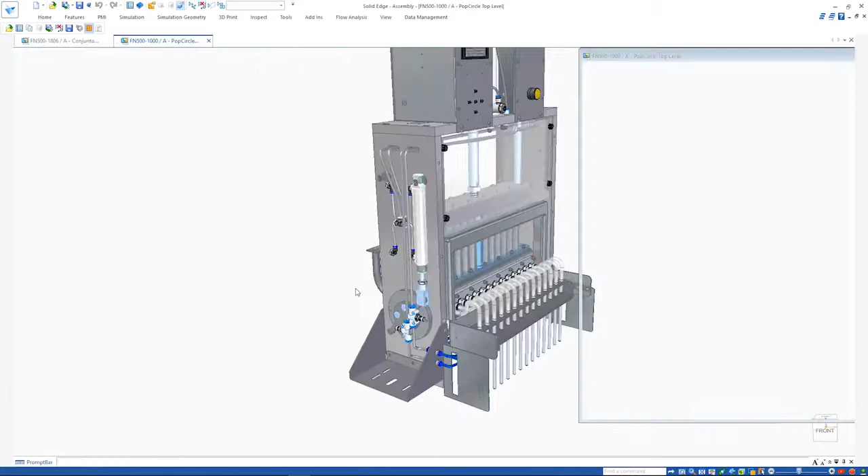It's common practice for suppliers to provide a 3D file of purchased items, such as this piston assembly. Using the new Internal Components option, all separate parts are contained within one single assembly file, with no parts written to disk. This enables faster import times, especially on larger data sets.

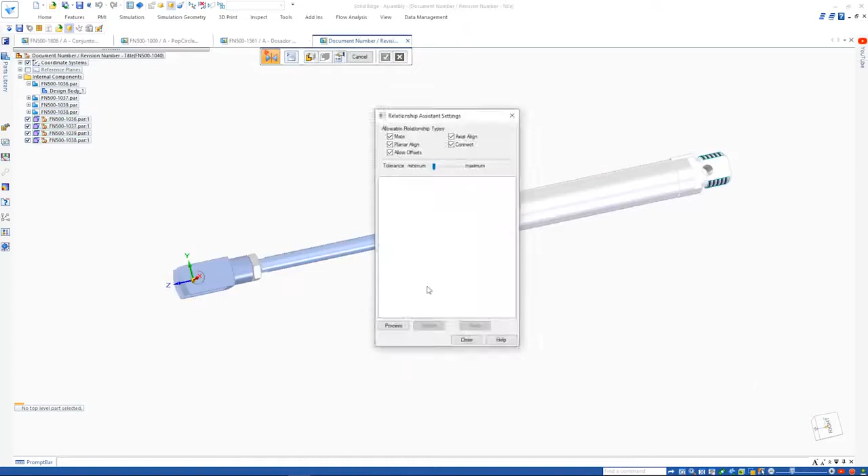Even though these parts are all internal, we can still analyze mechanisms and then assemble the item in a way it would work if it were a regular assembly. Assembly relationship creation and many other operations such as measurement can be performed on inactive parts. This provides increased performance and lower consumption of system memory. Here we see the correct operation of the piston assembly with its internal components.

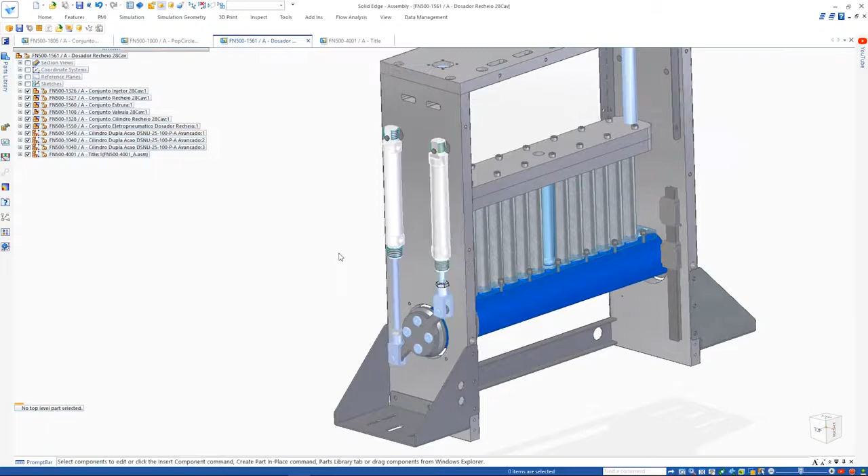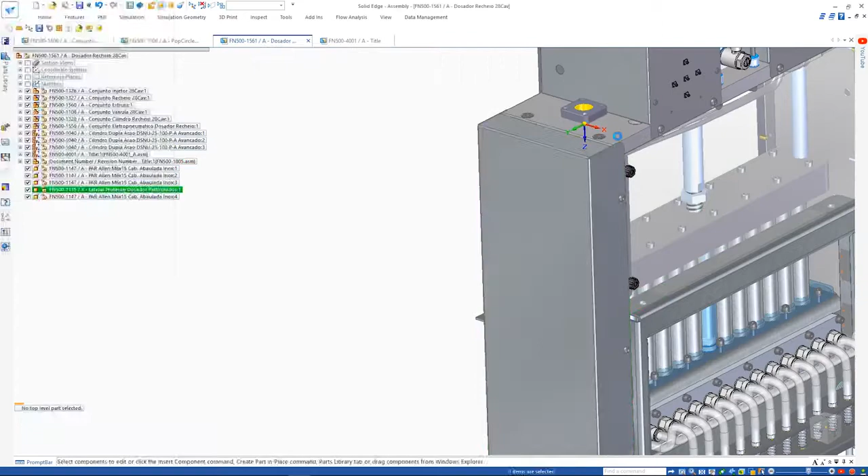Reusing designs is easier too. Now when copying and pasting multiple parts and assemblies between designs, existing assembly relationships are automatically captured and reused in the target assembly. A step-by-step process guides you through the operations to add the external relationships required to fully position the parts. All internal relationships come along for the ride. This significantly reduces the time for these operations.

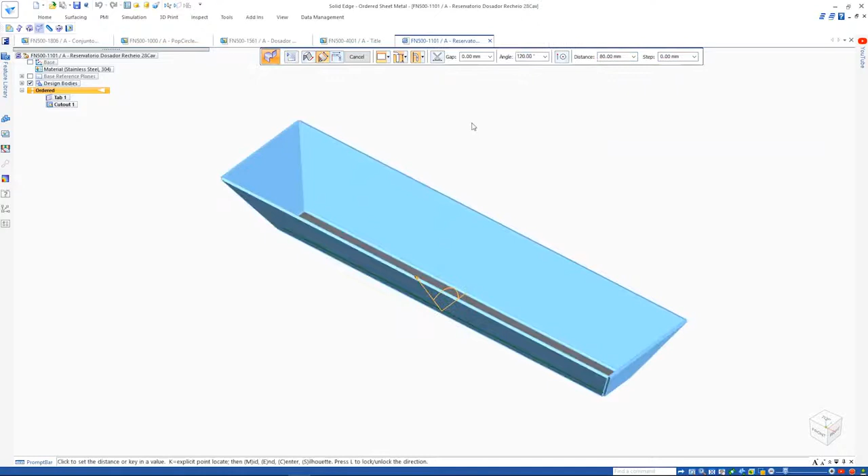A new multi-edge flange command speeds the process for designing sheet metal parts. Multiple edges can be selected at the same time, angles can be defined, and miters automatically added. It's as simple as picking the edges and then pushing or pulling.

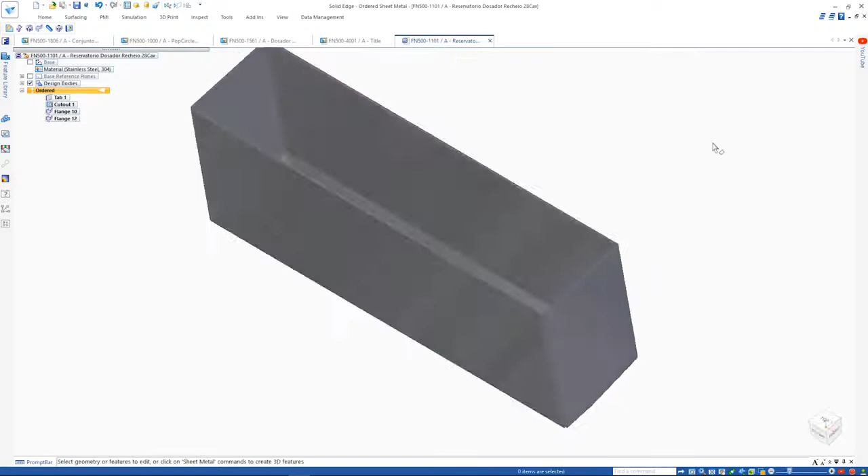In addition, partial or centered flanges can be defined, and trim options make light work of tasks that would normally require multiple operations, even with offset or gap distances if required. These sheet metal enhancements, along with many others, increase productivity and efficiency by being able to design parts faster and easier.

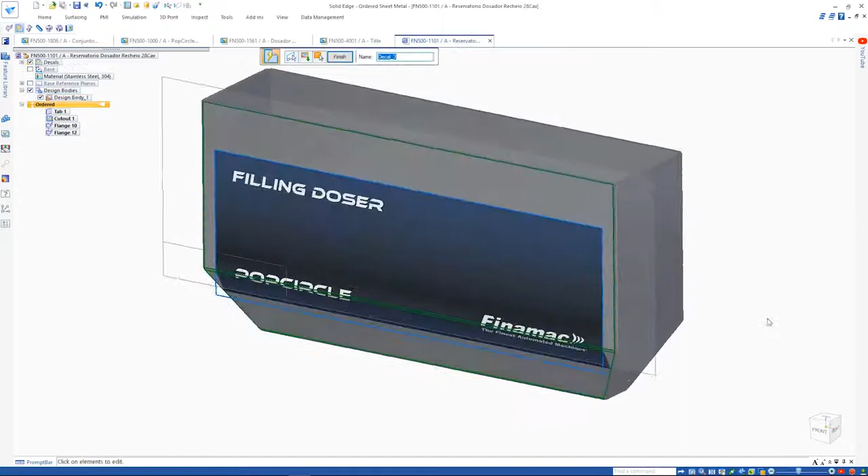A new decal command makes it quick and easy to add labels and images to parts. Simply select the desired image, define the desired size, and position it accurately using regular sketch relationships and dimensions. The decal can span multiple faces as we see here. However, changing the position of it is as simple as modifying the dimensions or relationships.

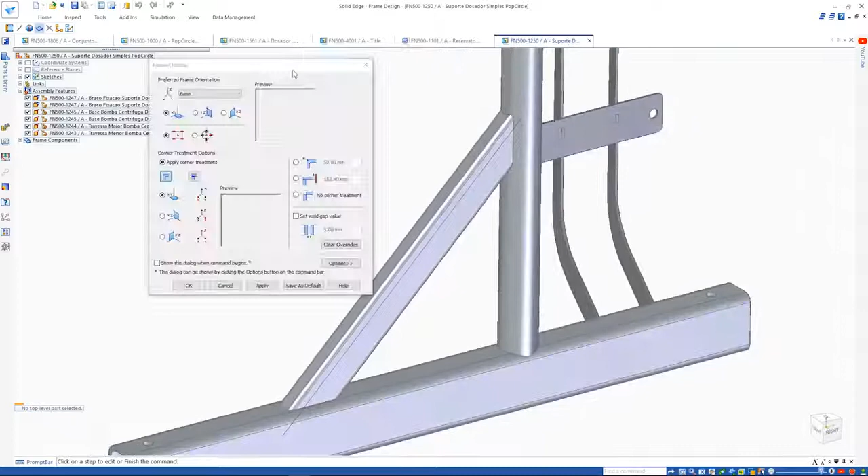Solid Edge 2021 also sees enhancements in frame design. Here we'll place a cross frame which has coping applied so that it matches the circular cross-section of the vertical frame. Now we can specify a weld gap between two frames. This is especially important in generating an accurate cut length of welded frames in our parts lists.

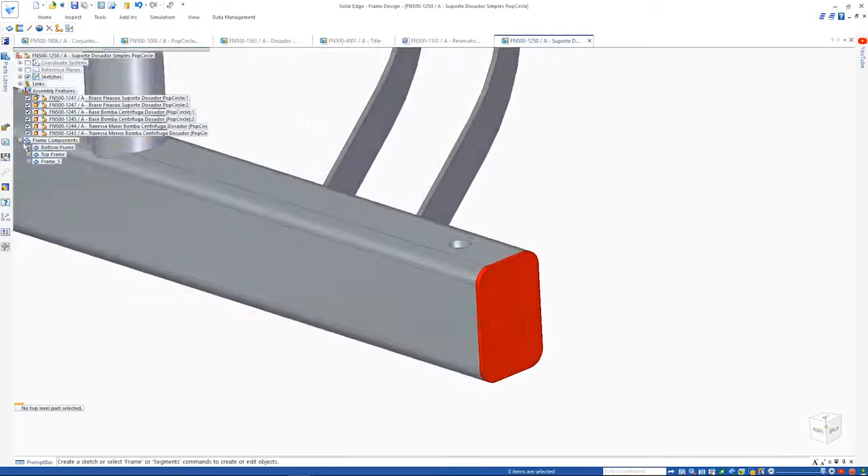The new end caps command allows the quick definition of these types of parts within a frame. This single command provides a wide range of options. Simply select the frame cross-section, choose the material, and specify the type. Choose from different types like inward or outward, and even define offsets or have chamfered corners. The end caps are reflected in the bill of materials, eliminating additional work for the user.

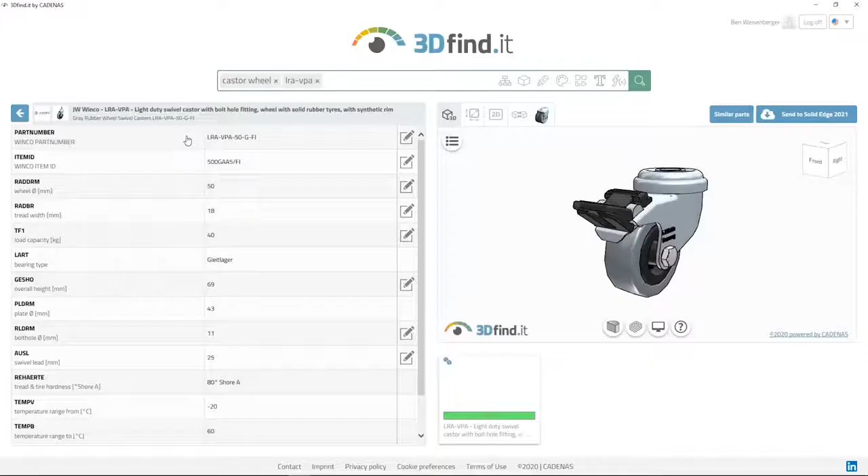A new online parts catalog makes finding and reusing supplier parts a breeze. There are various ways of finding models, even by using shape search if necessary. We can view 3D, 2D, and sectional views, or even compare two models to visualize variations. Once selected, a single click places the part into the assembly.

Solid Edge 2021 continues to employ cutting-edge improvements to help you realize productivity gains in the tools you use most often.